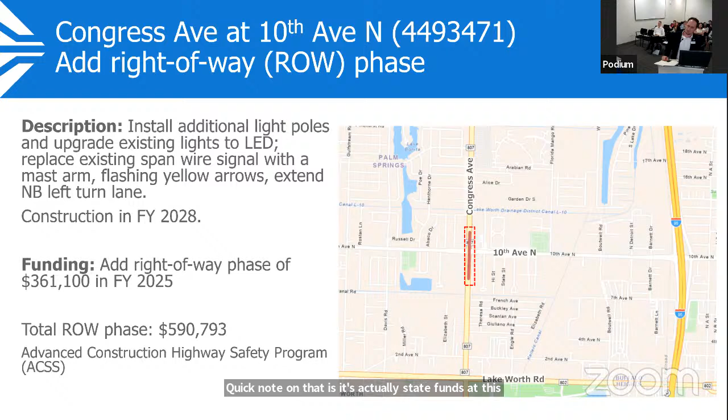The total funding for the right-of-way phase is going to be spread out over a few years. It's $590,000. The one that's really triggering the amendment is the earlier one, and that is for $361,100 in fiscal year 2025. This is a safety project. It's actually using safety funds that come from the federal government. Quick note on that is it's actually state funds at this time, but the state will seek reimbursement of federal safety funds in the future. That's what it means when it says advanced construction. And that's all I have for you. A quick one. Again, it's adding that right-of-way phase to this project.

Thank you, Andrew. Staff, are there any public comments on this item? Yes, Madam Chair. Chris Marsh, you can proceed with your public comment. I had a work conflict. Chris Marsh, do you have a public comment? Can you hear me? Yes. I wanted to join the meeting virtually. I had a conflict and was not able to attend in person. Okay, we don't allow virtual attendance, but you're welcome to watch the meeting. We'll mark you as excused. Okay, thank you.

Thank you, staff. Are there any other public comments at this time? No, Madam Chair. Okay, seeing none, do any committee members have any comments on this agenda item? Seeing none. I would like a motion, please, to approve the item, and then I can open the floor for further discussion if needed. So moved. Motion by Terrence. Second. Second by Brian. All in favor, say aye. Aye. All opposed, say nay. Motion carries unanimously. Agenda item B, motion to recommend adoption of fiscal year 2025-2029 TIP. At this time, I'd like to ask Andrew Euler to again present this item.

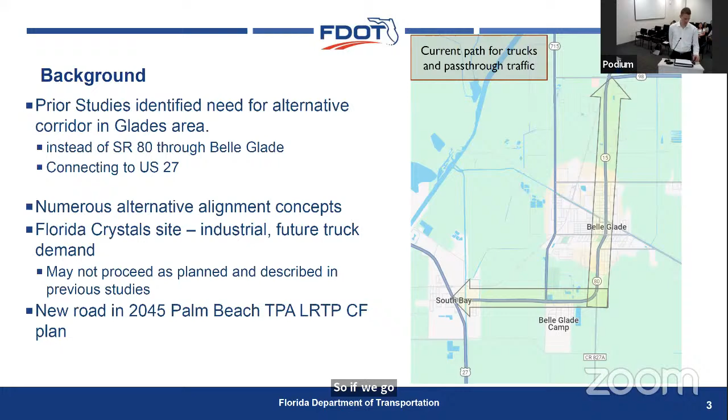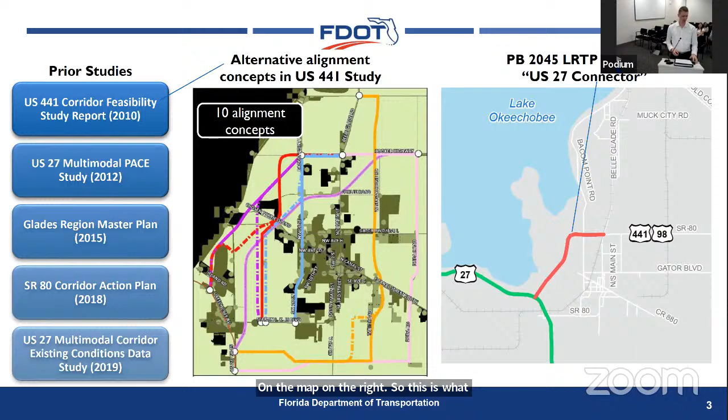There was also a PACE study, the US 27 multimodal PACE study. The Glades Region Master Plan mentioned some of the concerns regarding this alternative corridor. And the US 27 multimodal existing conditions data had a lot of the existing conditions data, including natural and physical data that we were looking at. Also, the 2045 long-range transportation plan cost feasible plan had this US 27 connector, which was fulfilling this role, and it's shown in the red line on the map on the right. So this is what we're studying to develop concepts regarding this connector.

The alternative corridor evaluation process, according to the Florida Department of Transportation, goes as follows. These are the major items that we went through. We looked at the prior studies, and we studied existing conditions in the study area. We had numerous stakeholder meetings with various stakeholders, industry stakeholders, public stakeholders, the Department of Transportation, including the TPA. We had meetings starting as early as 2021, actually perhaps a little bit earlier. I have a slide on the dates of some of those meetings.

We developed a purpose and need for the study, which I'll show in a future slide, including safety and system linkage. We defined the alternatives and a methodology to evaluate the alternatives. And then we had the evaluation of the alternatives according to those adopted methodologies. The outcome of the study is recommendations to exclude some of the alternatives from further study and to recommend alternatives for continued study into the design and engineering phase. So that's where we are now, having completed all those steps, and we're finalizing those recommendations and trying to receive input about that.

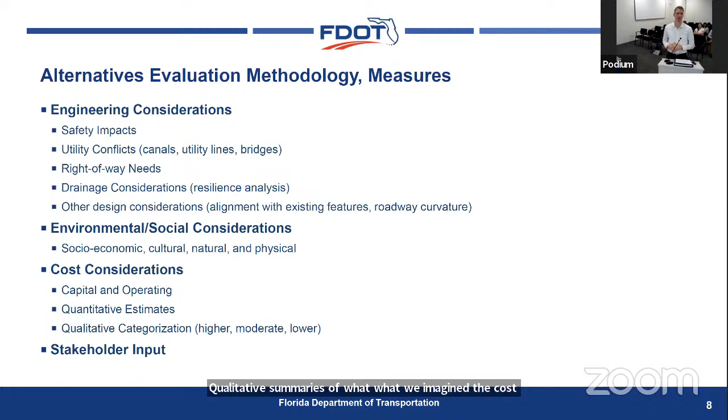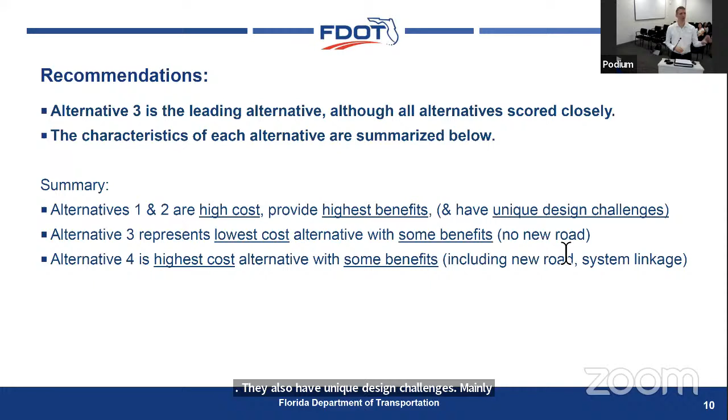The summary there is that alternatives 1 and 2 are the higher cost. Alternative 4 is also very high cost. You'll notice that alternative 3 is the lower cost alternative because it doesn't include building a new roadway. But the highest benefits lie with alternatives 1 and 2. They also have unique design challenges, mainly regarding the natural environment, the flooding in the area, moving closer to Lake Okeechobee and the drainage considerations.

Alternative 3 has some benefits, but it does not have a new roadway. So when we're looking at the purpose and need of system linkage and safety, it provides some safety benefits. It provides some additional capacity, but doesn't necessarily provide all the same. And I think that's the conclusion of the presentation.

Oh, okay, yes, sorry. On next steps, we are developing the final alternative corridor evaluation report. And we're going to want to incorporate input from the TPA as a major stakeholder and other internal review with FDOT. The PD&E studies that will come out of this study are sort of pending, and we would like the TPA's support on PD&E studies and prioritization. And we also think that we can include this in the SIS program for potential funding opportunities since it involves SIS roadways. So those are next steps.

Thank you. Okay, do we have time for questions? Yes. Okay. Thank you. Staff, are there any public comments on this? No, Madam Chair. All right, do any committee members have any comments for the connector feasibility study?

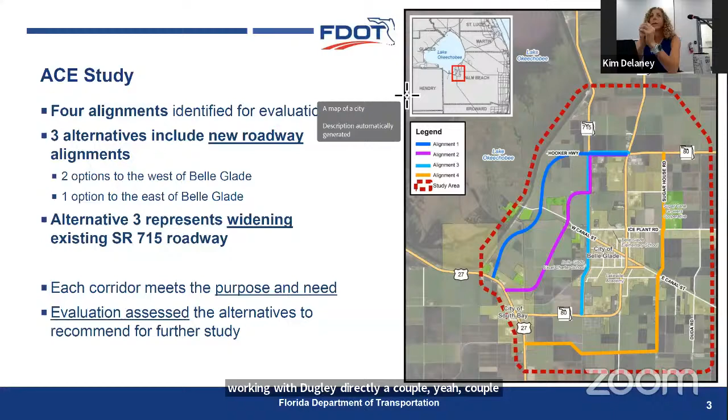So this is information, we're not taking a vote, but if I had my druthers, I'd ask that you run the numbers and use some of these methodologies suggested and come back and see if number 3 still really satisfies the need that was originally commissioned. But I don't know if that's an option, if the DOT is on a timeline. Is that an option to address the concerns of this committee? Because some of the calculation methodologies seem to drive us into the same old answer we always magically get when we commission studies like this.

I just want to be clear that this informational item is informational, and I don't think moving it along in any way allows for this committee to endorse or interpret that we are endorsing alternative 3. I want to make sure, to Terrence's point, that this is informational only. By us saying thank you for the presentation, it shouldn't be recognized as any endorsement whatsoever. I think we recognize the information that is presented, and your points are noted. I thought the slide said they had to come here, then they're moving to PD&E. You're not looking for a recommendation from this committee today, correct?

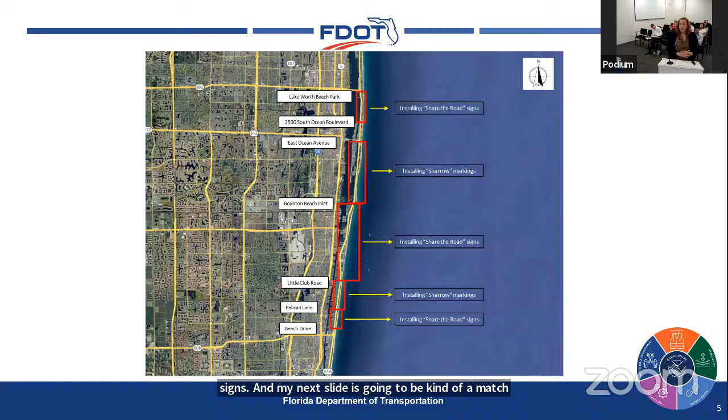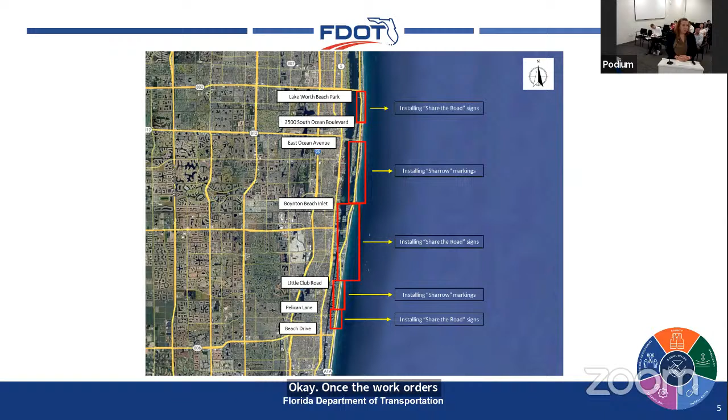And my next slide is going to be kind of a map showing where these different treatments are going to be applied. So it might be hard to see a little bit, but you can see a large portion of Palm Beach County. We have these improvements that are going to be installed within the next 6 months or so. Once the work order is executed, our contractor will have 60 to 90 days to complete installation of either these shared pavement markings or this improved signage.

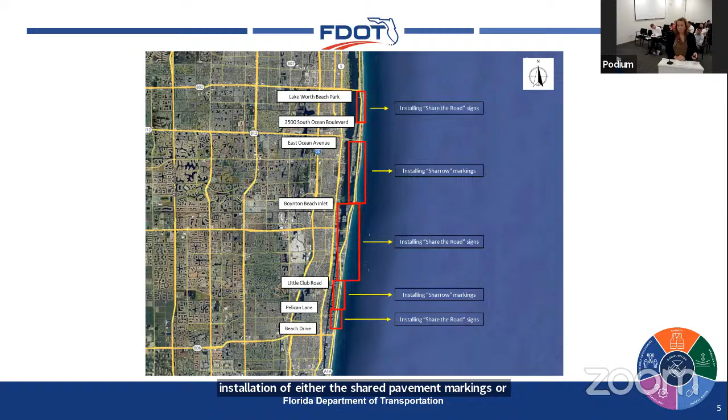Okay, so now I'm going to talk about the current feasibility study we have going on A1A in Palm Beach County. The goal of this study is to look for opportunities to improve bicycle and pedestrian facilities within the county. And so it's a 7-part process, and the entire study will take approximately 9 months. So the first step, which we are wrapping up now, is review transportation plans, data, and studies. And this includes FDOT's bike and ped master plan. It includes the LRTP. It includes the TPA's Vision Zero related to bicycles and pedestrians.

The data collection assessment is item 2, and that includes a desktop safety review, Signal Four Analytics review. It includes going in the field, driving the corridor, getting out, taking pictures, looking at problem areas. Item 3 is determining needs and goals based on the evaluation to that point. So starting to identify what can be done in the corridor based on review of existing documents and going in the field and evaluating the current conditions in person.

4th is identifying and evaluating the performance of potential short-term, midterm, and long-term improvements. And what we mean by short-term improvements would be those things that can be implemented in a short period of time, say 6 months or less. The midterm would take a little longer, and the long-term would be something we would be looking at including in a project in our 5-year work program.

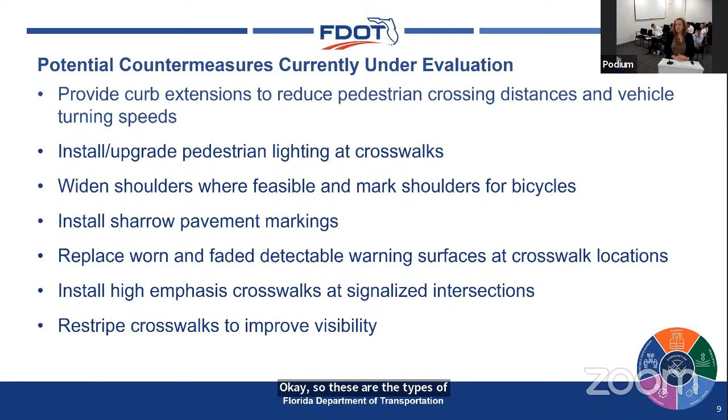Okay, so these are the types of countermeasures this study is finding that we could implement, again, in short-term, midterm, or long-term. So provide curb extensions, and by extending the curbs, you're reducing the crosswalk length, which is reducing the pedestrian crossing distances across the travel lanes. Install, upgrade pedestrian lighting at crosswalks for better pedestrian visibility to the traveling public.

Widen shoulders where feasible to mark the shoulders for bicycles. We can't mark the shoulders, paved shoulders for bicycles unless there's at least 5 feet of pavement width. So if it can widen to mark the shoulders for bicycles, that's something we can consider. Installing the Sharrow pavement markings, which we've seen on previous slides. So just putting that symbol on the pavement to remind the traveling public bicycles do have a right to be there. And I don't know if I mentioned this before, but the Sharrows can only be placed on the travel lanes if the posted speed is 35 miles per hour or less.

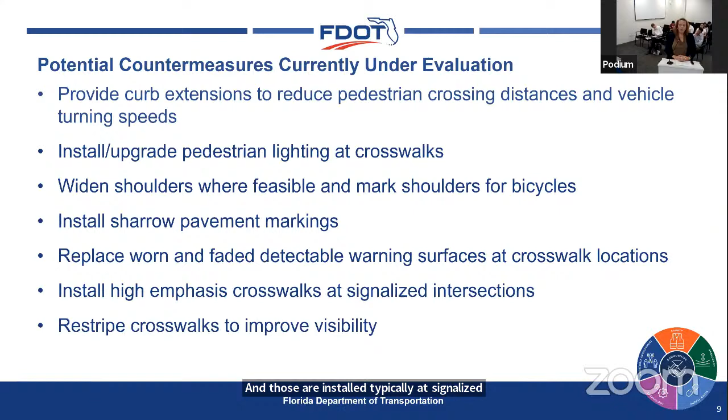Also, we're looking at replacing worn and faded detectable warning surfaces at crosswalk locations. Those are those yellow mats at the bottom of the curb ramps. They have the little domes in them. So we want to make sure those are highly visible. Install high emphasis crosswalks at signalized intersections. The high emphasis not only has the longitudinal bars, but they also have the transverse bars, and they're easier to see. And those are installed typically at signalized intersections, and then restriping crosswalks to improve visibility. So those are the types of items this safety study is starting to identify as potential countermeasures.

The first one is going to be in Boca Raton. So this is from Southeast 31st Street to south of Grand Court. Project manager at FDOT is Henry Okina. And the map on the right can show you the limits of what this project is. And what the project currently includes is resurfacing the roadway, an existing shared use path. We're reducing the travel lanes to 11 feet to accommodate 6-foot buffered bike lanes. So we're taking a foot from the travel lane, we're restriping it so there's an extra foot on the bicycle lane. We're installing Sharrows on the bridge.

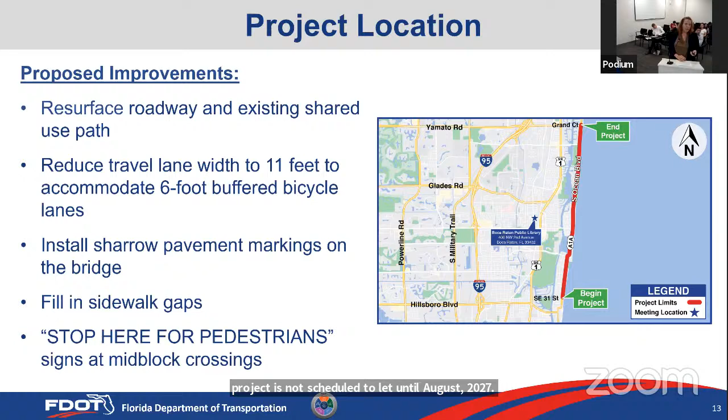The bridge does not have enough pavement width to provide a bicycle lane at this time. So we're putting Sharrows on the bridge and filling in sidewalk gaps and adding additional signage at the mid-block crossings. So those are the current improvements planned for this project. This project, the plans are complete, but the project is not scheduled to let until August 2027. So this is plans in district, it's called. So completed, we'll revisit it before the project is actually let.

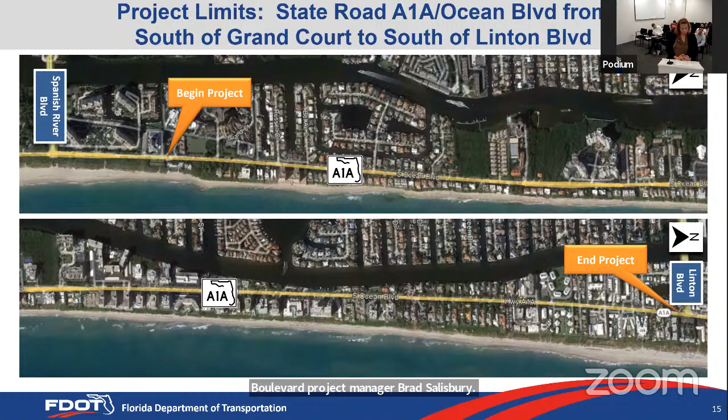The next one is in Highland Beach, and this is on State Road A1A from south of Grand Court to south of Linton Boulevard. Project manager Brad Salisbury. And here's a map of what the basic project limits are. And this project is 3.349 miles in length. This project actually was recently let and was scheduled to start construction on Monday. I haven't heard that that didn't happen, but that's when it was scheduled to actually start construction.

The improvements include roadway widening to provide the 5-foot bike lanes, because again, you need 5 feet of pavement to actually mark the shoulders for bicycles. Improve drainage to reduce ponding on both the bike lanes and the travel lanes. Upgrade the asphalt path to meet ADA standards, and that's an existing path. Update mid-block pedestrian crossings to the latest standards and install additional signage. So no passing zones in areas of concern.

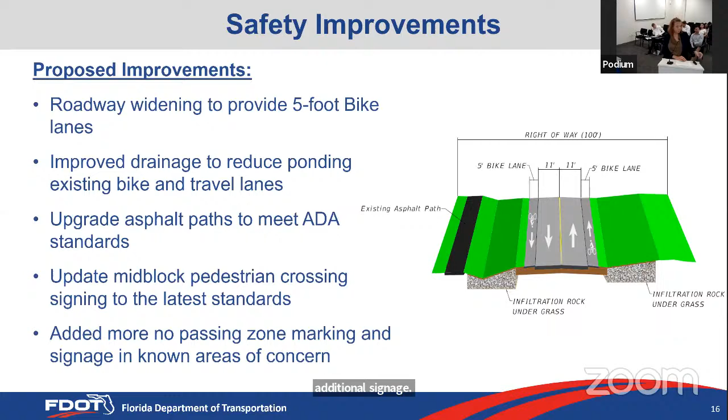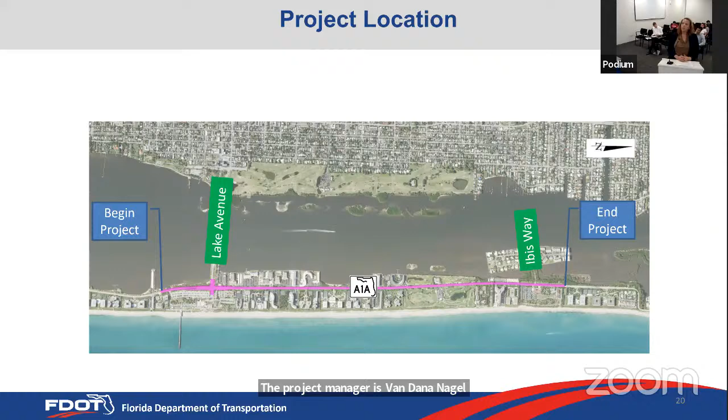Okay, now we're moving north. We're going to be in Lake Worth Beach and Palm Beach, and this is from south of Lake Avenue to north of Ibis Way. The project manager is Vandana Nagel. And here's a map kind of showing what the limits of this project are. And what this project is doing, it's increasing the sidewalk width from 5 feet to 6 feet, increasing the paved shoulder width from 3 feet to 5 feet. Again, then we can mark it for bicycles. Installing 2 mid-block crossings, and these are going to be located at Raymond Floyd Golf Course and Phipps Ocean Park.

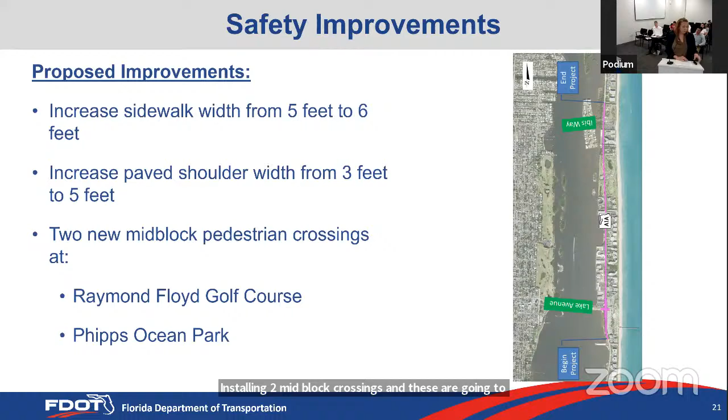Okay, again in the town of Palm Beach, and this is from north of Ibis Way to north of Emerald Beach Way. Our project manager again is Vandana. The map of this project limits are on the right, and the proposed improvements include providing a 5-foot bicycle lane where feasible and sharrow pavement markings where bicycle lanes are not feasible. So again, if the shoulder is less than 5 feet wide, we cannot provide the markings, so we put sharrows there. Including the actuated flashing beacons with additional signage before Sloan's Curve and Widener's Curve, just to give the traveling public more notice that there's a change ahead. And speed reduction signs ahead before Sloan's Curve and Widener's Curve.

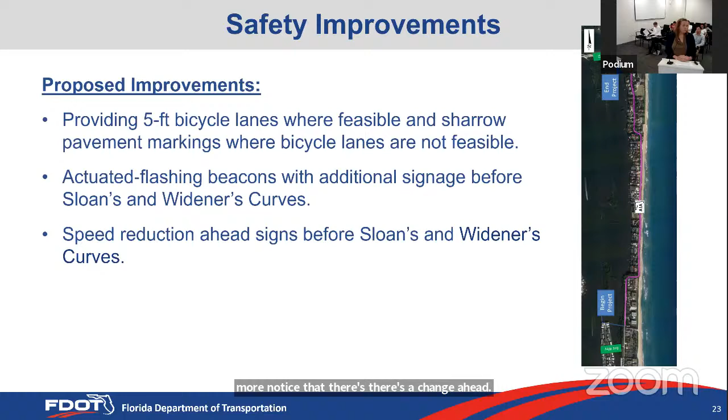Okay, still in the town of Palm Beach. This is from north of Emerald Beach Way to south of Royal Palm Way. Our project manager is Tuck Lee. And this project is going to be installing sharrow pavement markings because we don't have the shoulder width to mark for bicycles, replacing broken sidewalks, and updating lighting at intersections.

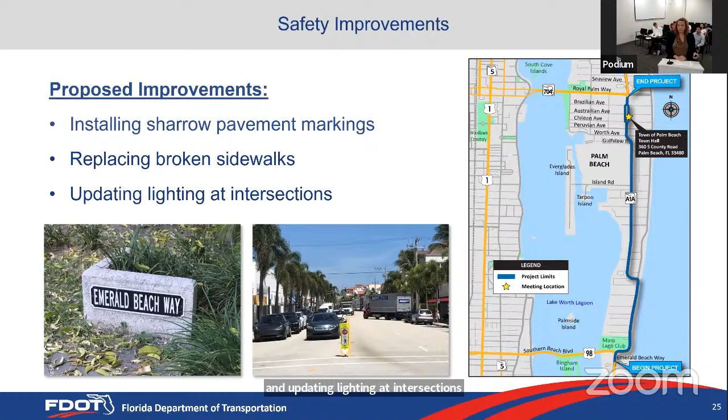And our last project is going to be south of John D. MacArthur Park entrance to Portage Landing North. Our project manager is actually here. It's Jeffrey Robert. And this project is in North Palm Beach, and it includes repaving the existing pavement, minor widening and restriping to provide 8-foot designated bike lanes. There's no widening in the park. Outside the park, we are widening to put 8-foot bike lanes, upgrading lighting at signalized intersections, and upgrading pedestrian signalization at intersections.

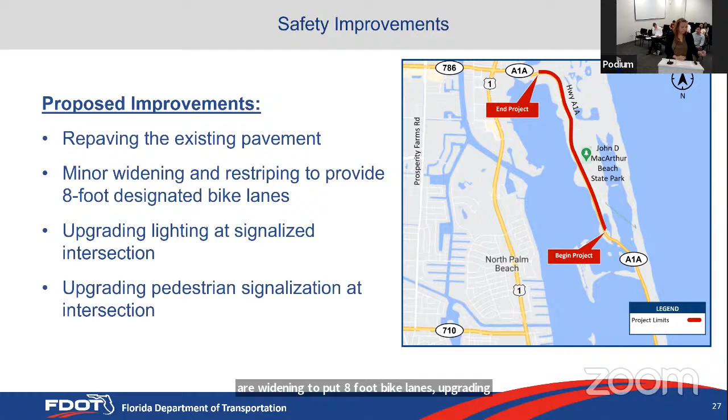And this is kind of a summary of the department's vision, or what our goals are based on our constraints at this time. We're looking to provide 11 to 12-foot travel lanes, improve bicycle accommodations on A1A, provide properly signed 5 to 7-foot marked bicycle lanes on A1A, provide sidewalks on both sides of the road, ranging from 6 foot to 12 foot on the west side and 6 foot on the east side. So that's where we are right now, and I would welcome your questions.

All right, thank you, Chris. Staff, are there any public comments on this item? Yes, Madam Chair, we've received a public comment from Mark Horning on behalf of Florida Share the Road Coalition. I'm going to read it. One of the resurfacing projects contained in the 5-year resurfacing program is FPID number 44766115201 from the southern limits of Boca Raton to the southern limits of Highland Beach. The details of wider buffered bicycle lanes and pedestrian improvements are amazing. However, the section on either approach to the Boca Inlet Bascule Bridge needs some immediate improvements. How soon could sharrows and any accompanying signage be installed in that area?

There have been recent incidents and encounters in the specific area that illustrate confusion on behalf of law enforcement and drivers as to what the requirements are for traveling through this area. So I know there's a planned meeting that we have with our Director of Development to address some of those types of concerns. So I will be able to follow up with information. I can't give you an update now as to when improvements could be installed in the short term.

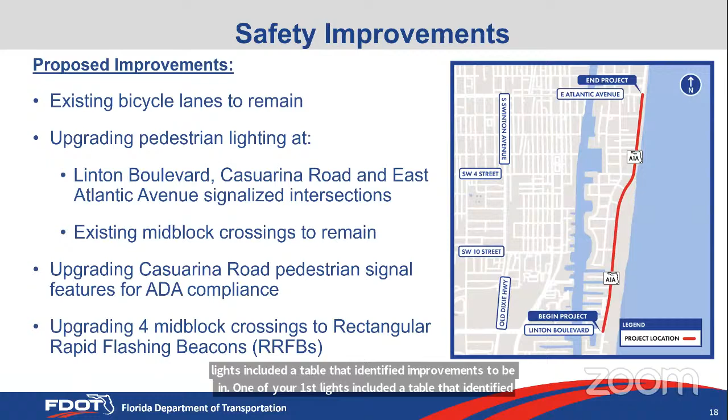Next, Alex. I'm a bit confused maybe on something that you pointed out, so I just may need some clarification here. One of your first slides included a table that identified improvements to be implemented by traffic operations. Yep. So basically all the improvements identified there were just sharrows. Sharrows and signage, yes. And I have some concerns about the use of sharrows in this type of road. I'm not sure about the safety effectiveness of that.

Then you got into details about specific projects on A1A that did include, in most instances, the establishment of bicycle lanes or enhancements to bicycle lanes. You widened bicycle lanes, you made them buffered when they were not buffered, and so forth. So we're talking about two different sets of projects, ones that only include sharrows, because some of them mention the same municipalities that you referenced later on. So that's my confusion. I'd be happy to talk that through.

Okay, so the table is the short-term improvements. Those are things that can be implemented within the next 6 months. Things that go through our 5-year work program are a little farther out, and we program resurfacing projects. We have a state statute that requires us to resurface the roads when they get to a certain condition, based on crack, rut, ride. And as projects are programmed for resurfacing, we go through the corridor and try to implement as many safety improvements as we can within the guidelines of a resurfacing project.

So those 7 projects I provided detail on where we're widening are in the 5-year work program, and the limits are based on the limits of the resurfacing project. So we're trying to do whatever we can within that existing project. The table with the short-term improvements are things we can do here and now, and they're not so expensive that we have to plan them out in our 5-year work program. Okay. So some are short-term measures, and then you have the longer-term measures for some of those areas. Correct. Okay. All right, thank you.

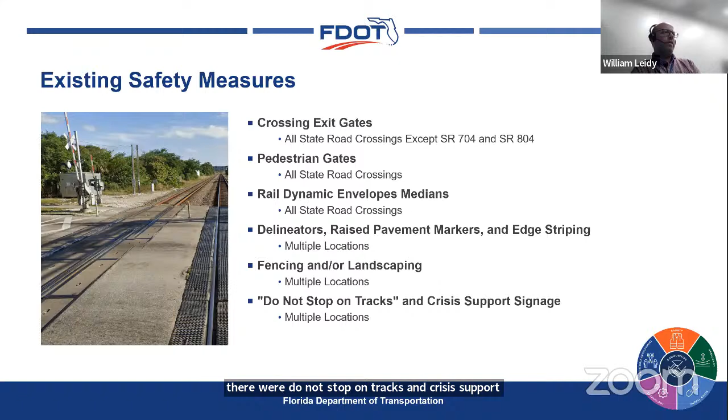All right, so like I said, we're going to talk here about fencing and/or landscaping. One project that DOT is advancing with Brightline and the municipalities is a RAISE grant to enhance safety. It covers the FEC Brightline corridor from Miami-Dade through Brevard counties. The federal grant portion is $25 million. Brightline and FDOT are each contributing $10 million, so an estimated total project cost of $45 million.

The main mitigation aims are to reduce vehicle collisions and trespasser strikes. The supplemental safety measures to be installed are dynamic envelopes, delineators, raised pavement markings, edge striping, a lot of fencing and landscaping, and I believe it's at about 35 locations specific to that in Palm Beach County, as well as do not stop on tracks and crisis support signage.

The agreement's currently under review by the FRA. They anticipated signing it in May. We're now at the beginning of June and it's not signed yet, but hopefully very shortly that agreement will be signed by FRA and that grant can move forward and that project can move forward. Next slide, please.

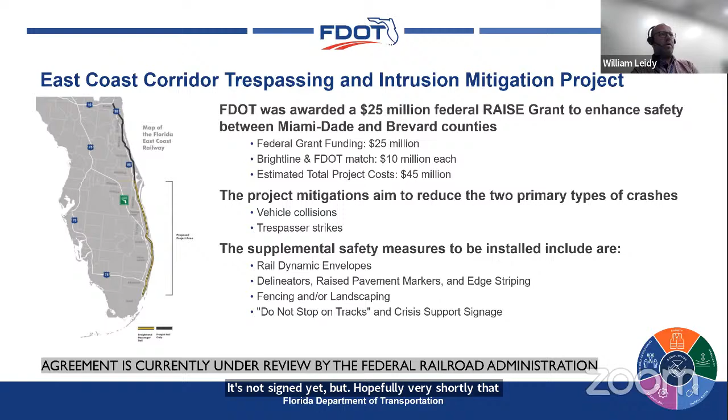One grant that's a little farther along is the OSSI grant. This was funded, the grant with 12.9 million with an FDOT match at 9.8. This is on SFRC. It includes Dade, Broward, and Palm Beach County. It's work on 25 at-grade rail crossings. You can see there's a lot of different items included in the improvements. 8 Palm Beach County crossings are included in this grant.

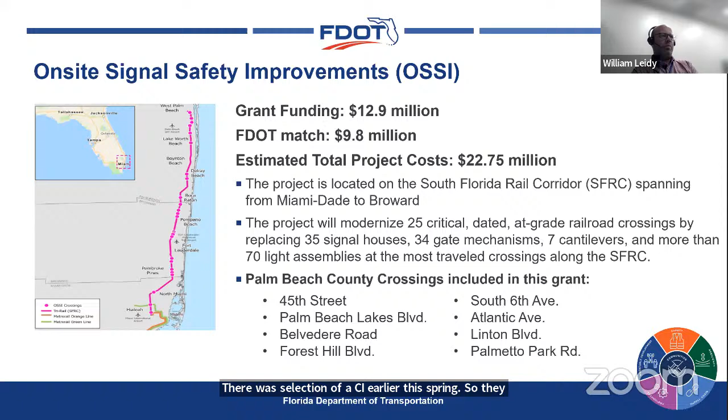And like I said, that grant was executed in fall of 2023. There was selection of a CEI earlier this spring. So they are moving forward with that grant and some of those projects will start to become implemented here in the next couple of years. Next slide, please.

An additional item I wanted to touch on is traffic signal preemption, which a lot was done with Brightline Phase 2. There's the requirements, any signal within 200 feet of a railroad crossing where the highway traffic queues have the potential to extend across the crossing. And then it takes into account traffic backups.

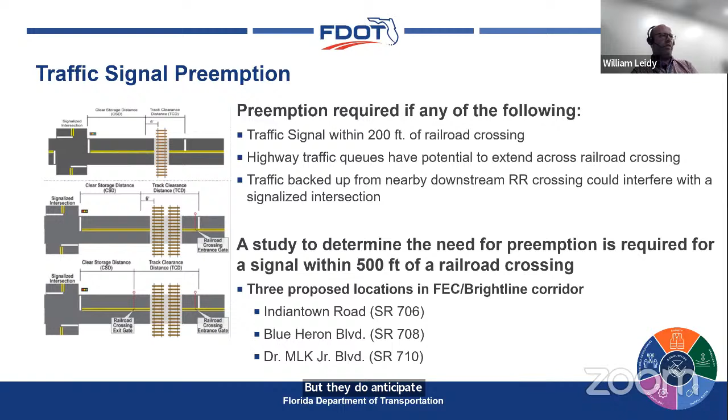The study is complete. There are 3 proposed locations on the FEC Brightline corridor, Indiantown, Blue Heron, and Dr. Martin Luther King Jr. Boulevard, as well as several local county crossings that are being studied as well. That continues to be advanced. There is no construction funding that I'm aware of for any of those projects yet, but they do anticipate advancing some of those into design here shortly. Next slide, please.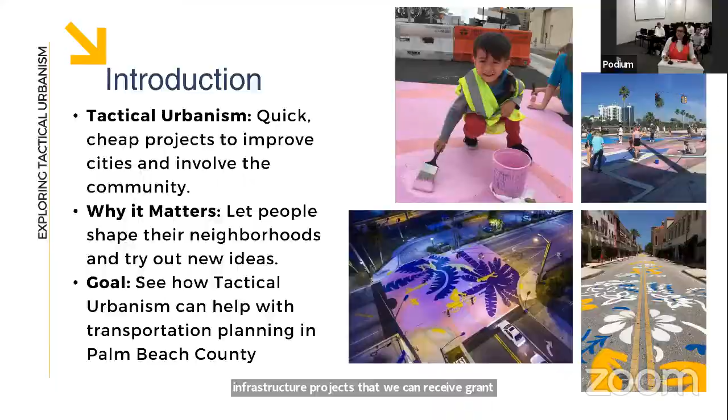And perhaps the most notable tactical project that you may know already as we vacation in New York City is Times Square. This occurred during 2007, 2008, when I was living in New York, as Janette Sadik-Khan changed this landscape by repurposing space for pedestrian use. And during that same time, we in the city of West Palm Beach and in Palm Beach County were also experimenting, on a smaller scale.

In 2007, it was the parking day presented by the DDA, transforming some parking spaces back into public space. What makes a lot of sense is that it shaped the policy presented over and over again about outdoor dining. More importantly, it was the outdoor dining experience that we encouraged and were able to transform during COVID. And as the city was a smart city collaborative in 2020 as part of this research project and Transportation for America, a lot of this testing and piloting helped shape the transformation that occurred on Clematis Street itself.

This project was part of the city's mobility study that was adopted in 2018. And again, in 2019, these projects were being implemented as we see in the city. So what is tactical urbanism? We can simply describe it as something like a pop-up bike lane. It's a demonstration project. It's a pilot project. It's to showcase behavioral changes, right?

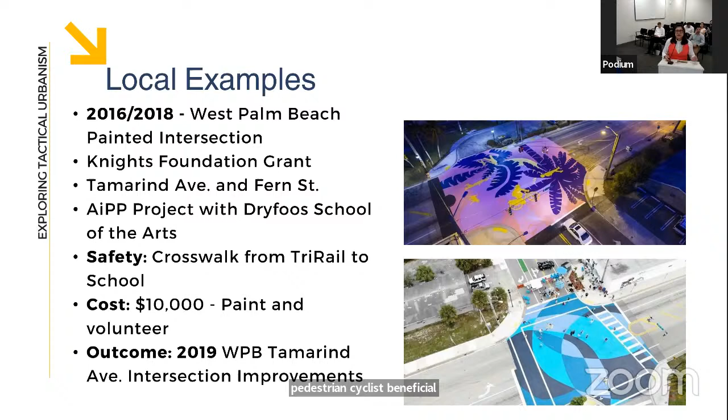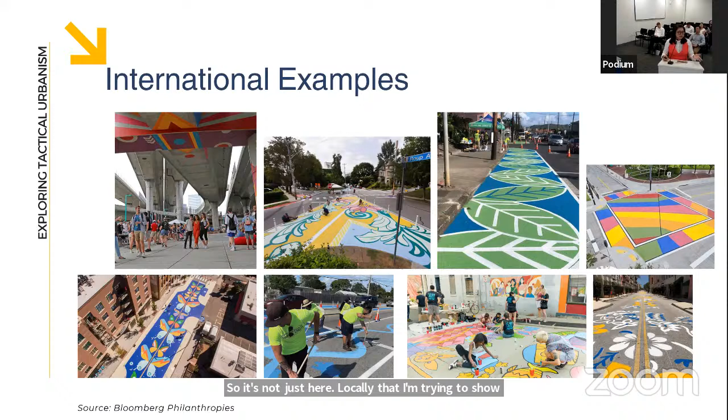So moving forward in the city's capital program, it is something that should be considered from a safety, from a pedestrian and cyclist beneficial perspective, because this is something that the school kids and the students are asking. So it's not just here locally that I'm trying to show examples, here in the city or here in Palm Beach County, but it's a global phenomenon, as cities around the world.

And there's been a huge transformation of a global movement of really tactical projects. And we think of tactical projects and we have to take away all the beautiful, all the painted, but really quick build projects, right? What can you put on the ground quickly so that you can change behavior? And we sat through presentations as, is there a resurfacing program that we can go in and restripe our travel lanes or whatever that may be?

Why is this important? It's because there's a lot of funding available out there, available right now. And there's been changes in these rules, and we see it over and over again, right? So simply put, I know that the TPA has been advocating for the SS4A grant. And we think of it up to this point as either a planning grant or a construction grant, but the rules have changed.

So the first round, whether you are aware of this or not, it was mandated by Congress that 40% of the grant application goes to planning, because there's not a lot of planning grants out there or planning project implementation. But this time, a lot has changed. And I wanted to spend a little time talking about tactical projects, experimentation, and low-cost projects.

So your resurfacing program. If your resurfacing program is on a bicycle network and you see an opportunity right there, that is the first thing that you should consider, right? And Naresh, congratulations to the city of Boca for receiving $5 million, is it? Oh, I'm sorry, I overspoke, $4 million. It's still a very large capital program. And you do not need to have your action plan in place to receive additional funding.

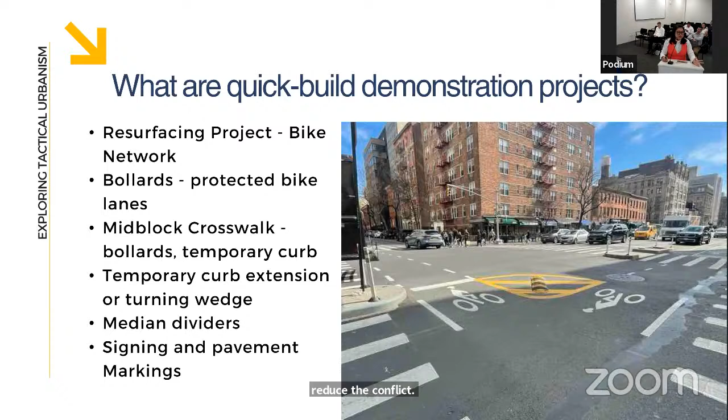I want to throw this image out there of New York City, even though they have had this implemented for over 10 years now. This is called a turning wedge, where in locations where you have high turning speed or a certain type of crashes, they have implemented this to reduce the conflict. And it's cheap, it's implementable, and this is what will help us bring quick build infrastructure into this area.

And of course, this next step is really for me to advocate: pilot your new ideas. If you want to make your child very miserable by taking them out to do a tactical project all day in the sun, you are also welcome to do that. But really, these types of projects build consensus, and it helps with our public engagement, because we know the hardest part about any implementation project is really getting public buy-in.

And these types of projects will really help get us to where the county needs to be. And it's trending down on our crash data. So that quickly concludes my presentation. Thank you so much. Thank you so much, Wynn. Are there any committee comments on the presentation at this point in time?

All right. Keep in mind, we have another agenda item as well, so I'd really like to move swiftly through these comments because we still have Vision 2050. I also have a time certain where I have to depart, and there's no vice chair, so 11:35 is my mark. Naresh. I'll make it really quick.

Thank you for the presentation. It's a $5 million total project, $4 million grant, and $1 million local match. So that's all for demonstration planning and supplemental. So I encourage all the municipalities to take advantage of the future rounds of SS4A for this year.

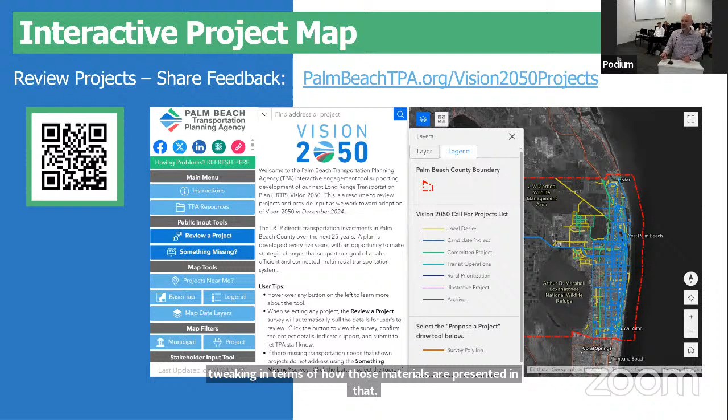We have developed a tool that you can use to review projects and provide your input. There is still some tweaking in terms of how those materials are presented in that online tool, but we are trying to get the word out. We'll discuss this more as we get into programming, but how your projects are in terms of whether they're supported or not. So we'll highlight that when we come back. Skipping over these as well.

So the key point here is to tell your neighbors, get folks to come out and give us their input. We need to hear, do people support these projects? Are we missing things? And we're going to have a series of upcoming meetings at the end of the month, trickling slightly into July, to get community input on this outreach.

We want to remind everybody, tell your neighbors. The folks in the room, the folks who engage with TPA, is not going to be enough. We need to tell everybody. So get the word out, tell them to come to the meetings, tell them to use the tool. It's online 24/7. Again, we'll be in the back of the room. I want to say thank you for the very brief presentation to get everybody out of the door on time. And please check out what we have in the back of the room and speak with us.

Thank you, Nathan, for that brief presentation. Appreciate that. All right, are there any public comments on this item? No, Madam Chair. All right, do any committee members have any comments?

Jamie? Given the late time, I'd like to propose we push our meetings back to 9 o'clock. Ha, ha, ha. Second.

Are there any other comments as it relates to the 2050? We're not getting into that today. 2050 project prioritization. At this point in time, I think we all know and appreciate all the hard work that's been done toward this and that is ongoing, and it's essential that each jurisdiction participate actively and provide meaningful input. So thank you for the update, the ongoing updates, and we'll keep engaged through the process.